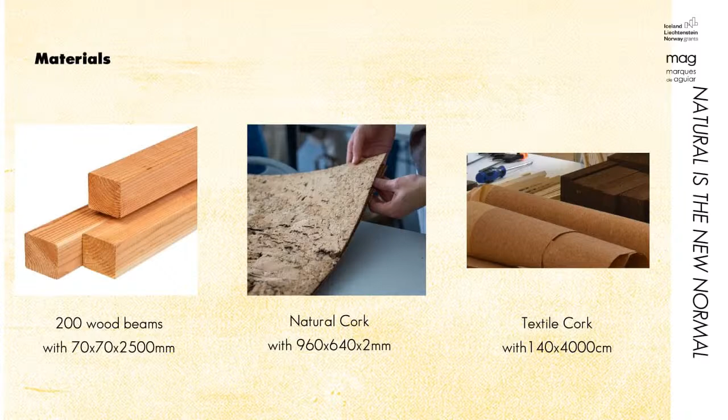The shelter will be for 5 to 40 people, and the idea is to use wood and cork with the dimensions that we'll share now. It must be very easy to build, disassemble and transport in a car, with assembly and disassembly by people with no construction experience, like us. The winning project will be the foundation idea for the construction of an itinerant shelter as the first Experimenta Paisagem Museum equipment, as well as earn a trip to Norway to participate in a workshop with architect and professor Sami Rintala.

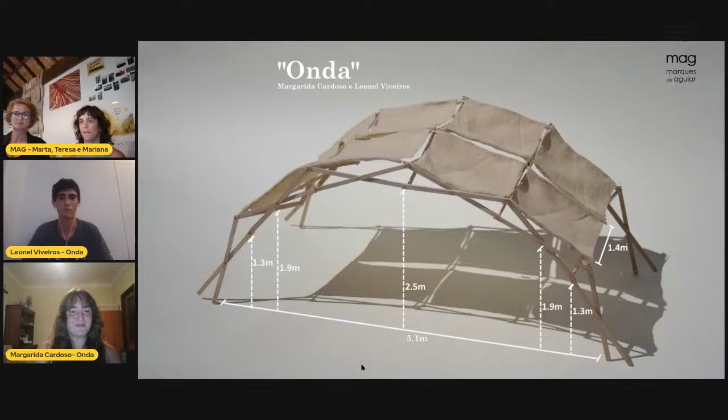But here we have just a few measures of the Onda. So you can see on the max point 2.5 and on the minimum 1.3. So you can get an idea of the proportion, or how it would be in real life when constructed. And that's it. Thanks, everyone.

Okay, thank you very much, Leonel and Margarida, for your presentation of Onda, with this structure that seems like a mechanism with a sequence of hinges that aim to achieve this challenge to go in the car and to be easily assembled by anybody. Thank you very much. So we go to the second group, Concertina.

No, here, we have Bruna. Which one of you will? I think that's Bruna. Yeah, Bruna is here. Bruna, okay. Sorry, Beatriz. Which one of you is Beatriz? Beatriz. Yeah. Okay.

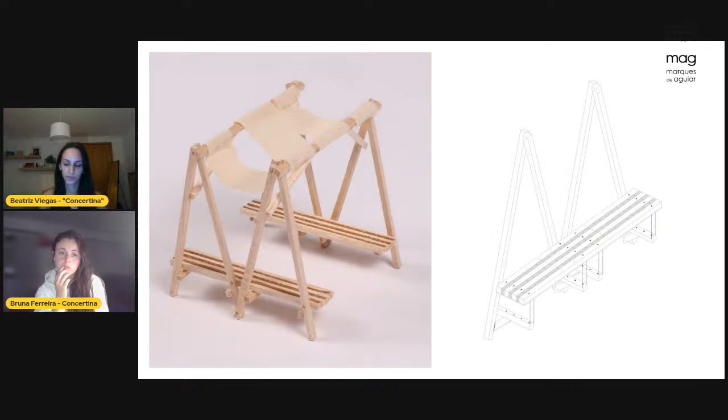Just like a concertina, our shelter expands and contracts in size, which means that each module can have two different configurations. The first one is the one we see here, where the structure is more open, and the second one is this one, where the structure is more closed.

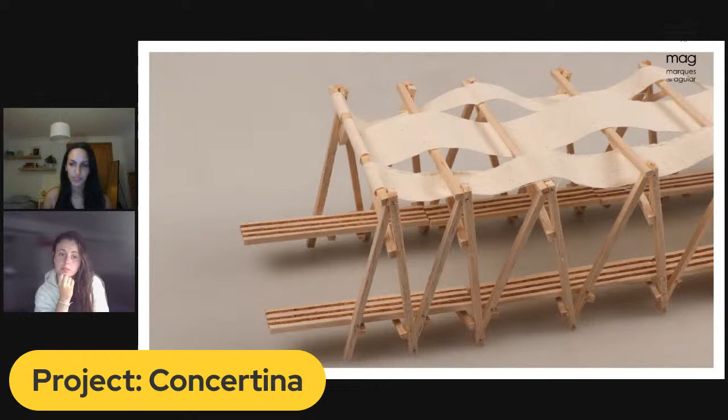This shelter is formed by three main elements. The first one is the structure. The structure is made with wooden beams. The second element is the benches. We have one on each side of the structure. They are also made with wooden beams, but they are also combined with cork blocks.

The last element is the cover of the shelter. This cover is made from strips of textile. This adds movement, delicacy, and fluidity to the shelter by creating a contrast with the wooden beams and their stability and rigidity.

We wanted our shelter to be versatile and adaptable to different environments. So that's the reason why we decided to design it with modules. Depending on the number of participants for each event, the shelter can have from 1 up to 6 modules. They can also be arranged in various ways, attending to the type of site and the type of event that is being planned.

Here we have some examples of ways that we can organize the shelter. The modules can work individually, but they also can work together. In this image, the shelter is arranged in a straight line, and all of the 6 modules are used and connected. This configuration can be used, for instance, following the direction of a street or on a bridge.

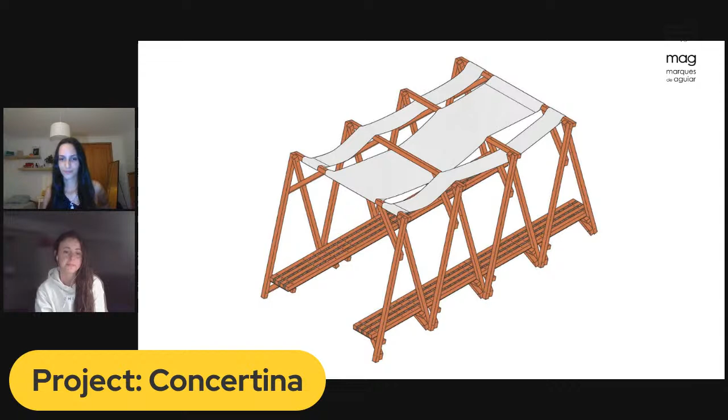Okay, thank you very much, Beatriz and Bruna, for your presentation of Concertina, this interesting proposal with a portico structure with a counterbalance of a bench, thinking together shadow and sitting. Thank you very much. So we're going to the next group.

Just a second. Jorge, can you put the... in display mode. Modo da apresentação, o slide. Oh. Can you see it now? Not yet. And now? Yeah. Sorry.

As I was saying, today we are going to present our project, in which we put a lot of effort, creativity, and sensibility to reach our final idea, doable by any kind of person, especially young students with zero experience in construction.

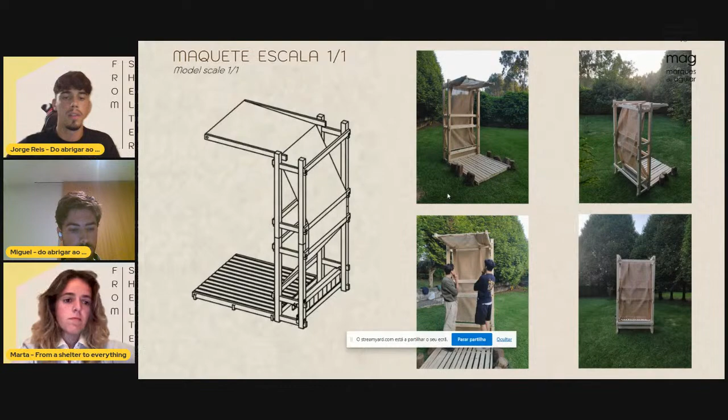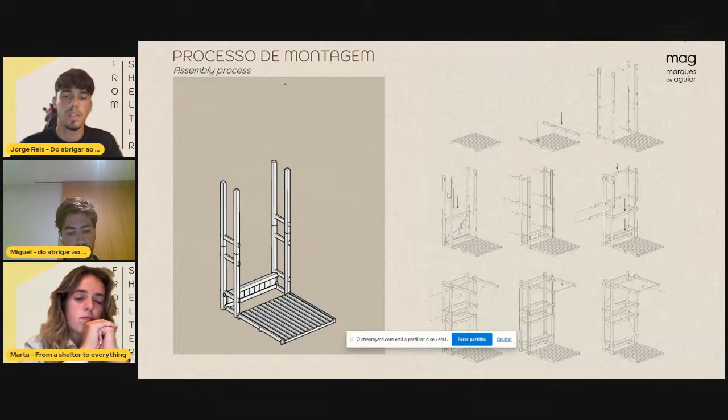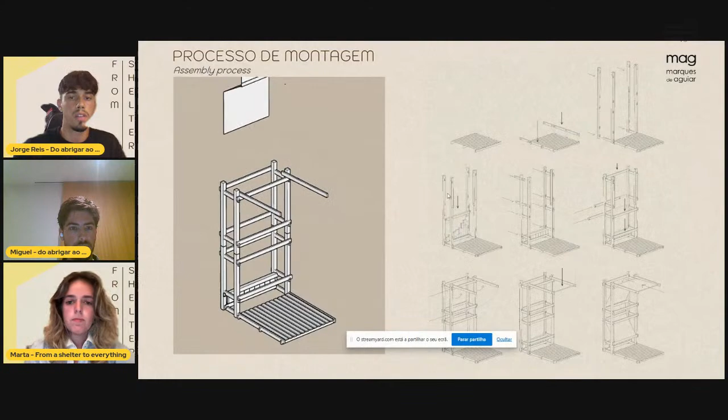As you can see, the approach chosen to respond to this project was the development and construction of a simple, versatile, and aesthetic model. For its visual character, the various forms of the materials available were contemplated, making use of the wooden beams, the dense blocks of cork, and the flexible textile also in cork. These features and materials result in a strong visual identity, even when the model is isolated in the territory or regrouped with many copies in a whole.

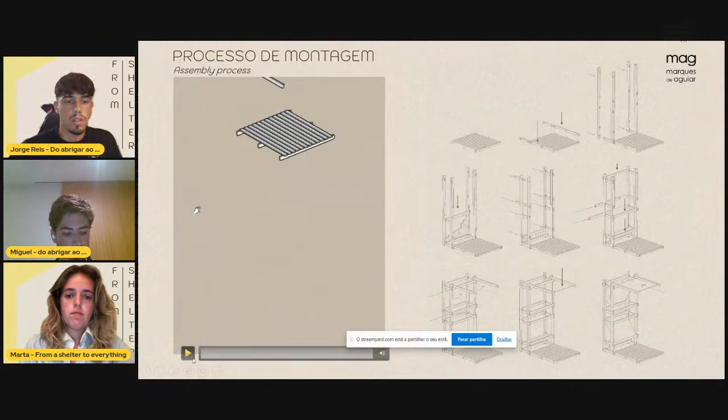How was this model developed? Taking as a fundamental concern its process of assembly, disassembly, and transportation, it was clear early on that we needed to avoid fitting using nails or definitive solutions that would delay or compromise this process. As you can see in our assembly process, the animation shows how we can assemble our model really fast and then repeat the process.

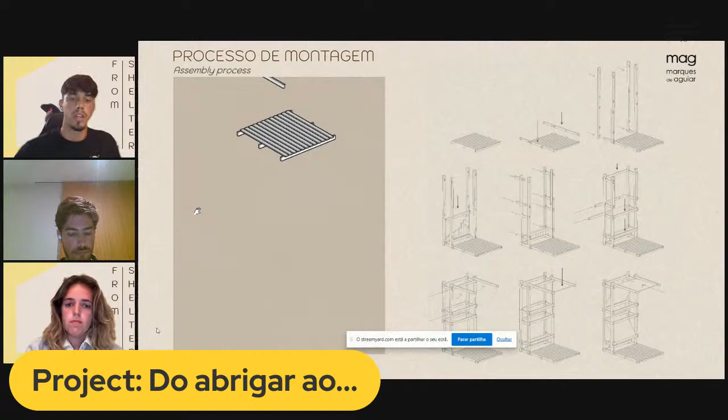A modular piece was then designed that offers the occupant a floor raised from the ground, a multi-purpose intermediate structure, and also a possibility of covering to shelter either from the rain or the sun. These same constructive steps were respected in the construction of a full-scale prototype, validating this methodology. The pallet-style structure that serves as a floor is the only element that uses nails. However, this piece comes already pre-assembled, as you can see on the second graphic.

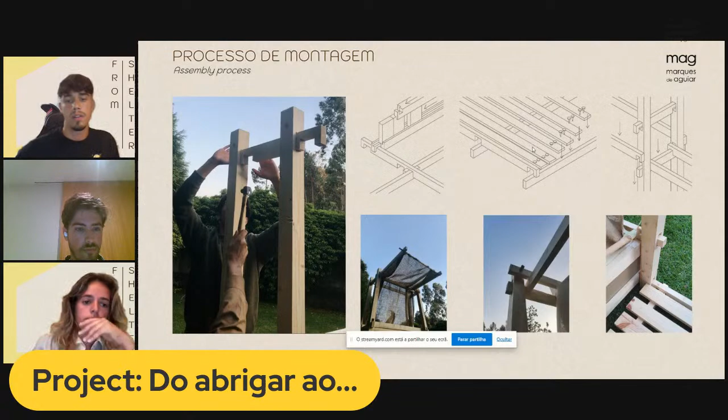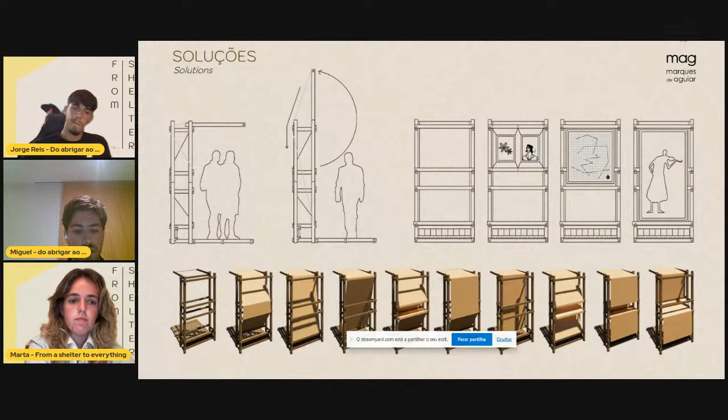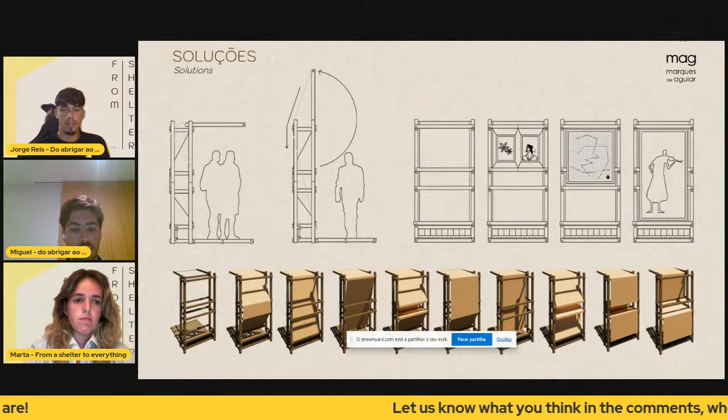The decision to design a module comes from the intention to take advantage of the versatile character that a solution of this nature has to offer. The module is itself capable of opening up to the sky or sheltering from it through a system of moving parts. It serves as a shelter, but also as an exhibitor for paintings, information panels, or large screens. The skin that covers it also allows it to present a very varied stereotomy through a dance between this flexible material and its more fixed wooden structure. Wind interacts with it as well in a natural way.

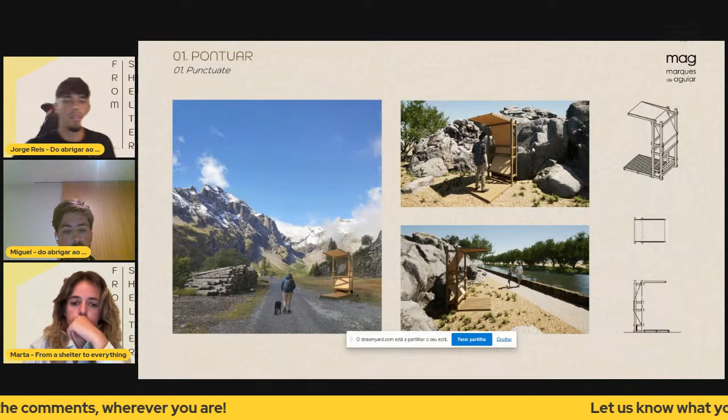Punctuate. In isolation, it works as an information post, meeting point for groups, and trail marker. Through a modular repetition exercise, we can design other typologies. In this case, isolate: closed on itself, providing a more introspective and private character, for example, for meetings or sessions of meditation and connection with the present moment, easily deployed in any type of enclosure.

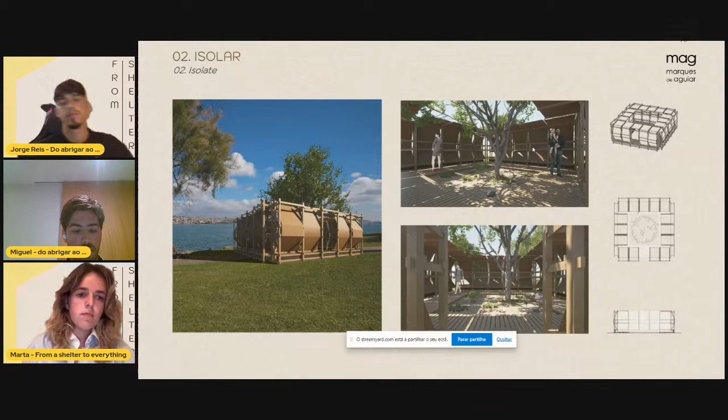Number 3, celebrate: a wider solution for programs such as performances or local markets, activities with a larger audience in places such as squares or historic centers. Number 4, follow: a more extensive composition in order to follow trails or draw new routes, being able to narrate a story or exhibit an art collection, thus allowing this architecture to be immersed in more challenging and narrow spaces.

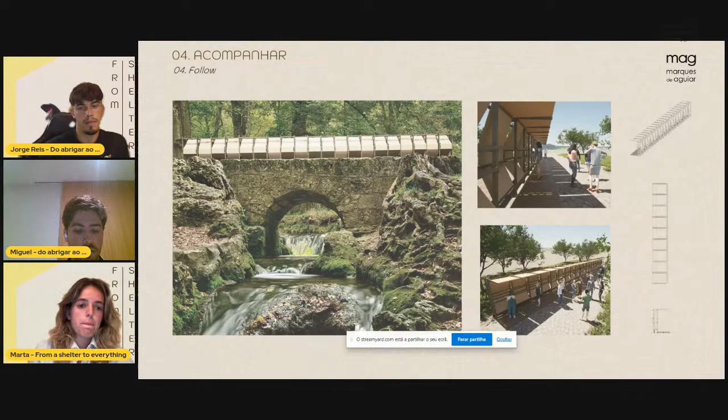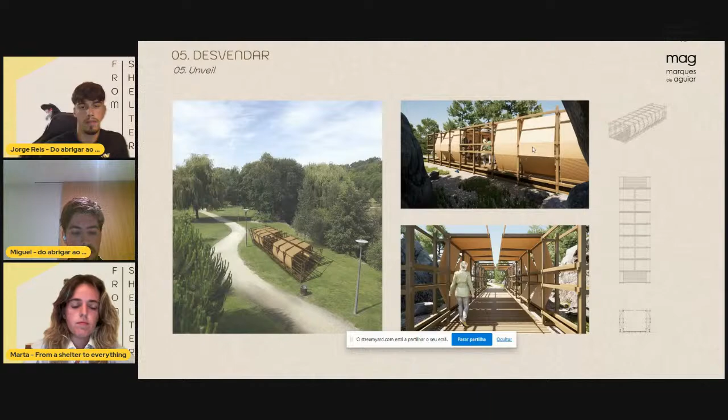Number 5, unveil: for a more immersive walking experience, this tunnel-style composition can be applied to streets and historical parts of the village, completely sheltered from rain, wind, and sun. And finally, number 6, rest. Valuing the landscape, this last solution aims to frame and use as scenario a particular perspective of its surroundings, such as a waterline, a plain, a mountain, a valley, or a viewpoint of the village, as a background for events like lectures, dances, or other types of activity in which a deep connection with the surroundings is sought. Closing on all other sides, the vision is guided to a single direction.

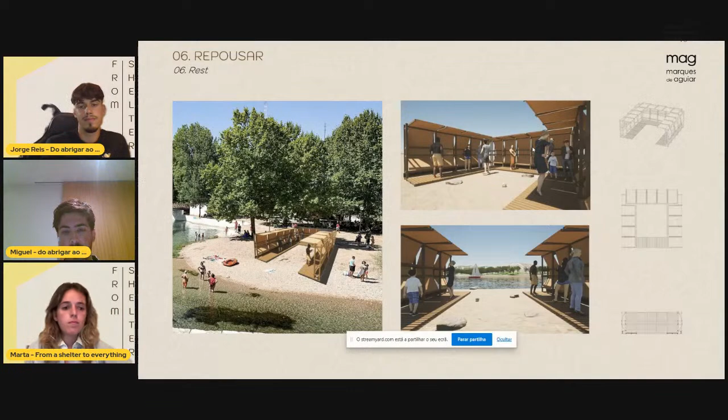From an early stage, we understood that this project challenged us to think beyond one place and one purpose, that the answer will be a flexible and adaptive architecture, able to dive and dance through the streets, squares, beaches, trails, and nature that will soon be the stage of Cortiçada Art Fest. Its location and artists are unique and deserve an architecture that values them as such. This is our proposal, from a shelter to everything.

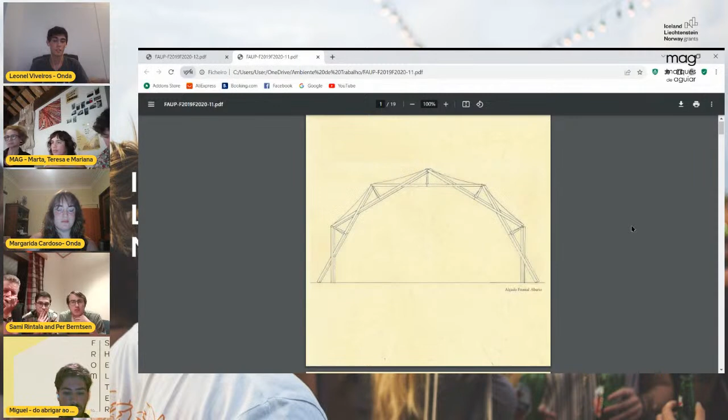Right, this one. I think this one may work. It's on PDF, but it's what we have now, so it may work. So we have here the drawings that we used to submit the project to the event. They are drawn by hand, as you can see, because our group is from the second year so far, so we don't use much computer yet. So it was kind of amazing that we were able to do this.

You asked about the main structure, this one in here, whether it is metal or isn't metal. So we put it in metal, the main frame that connects all the woods together to do the first movement and the longitudinal movement. It doesn't need to be metal. It can be in wood. At the moment, we put in metal, but next we thought about wood, etc. But the time was already up, so we stuck to metal. Why metal?

So the metal was my idea. I put in metal because I have a little experience in construction, not architecture, but home stuff, little things you do. So it was only thinking about the safety of the structure. I was thinking about the wind, because it's a big structure, as you can see. And yes, you have little spaces beneath the cork, the fabric cork, to let the air and the wind pass.

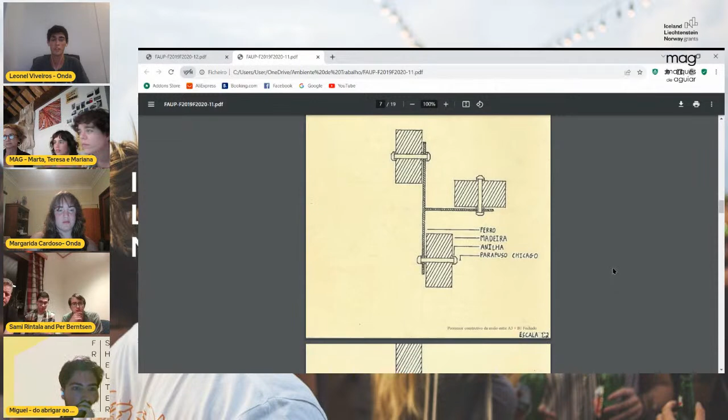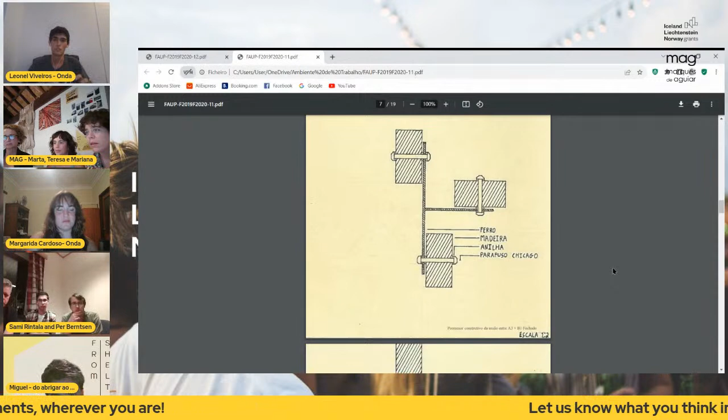But I was thinking that if the wind is too strong, it may break, and it's not going to break in the boards. It's probably going to break at the junction of the boards. It's the weakest point in my view. So I stuck to metal. Simple, that's it. And someone asked me the way the whole structure closes and stays together. That's a part more for Margarida, but I think I can explain. When we designed, we didn't build it at 1:1 scale, because it's a big thing. So we thought about it when it's closed, when you see a junction closed, and just go faster in here.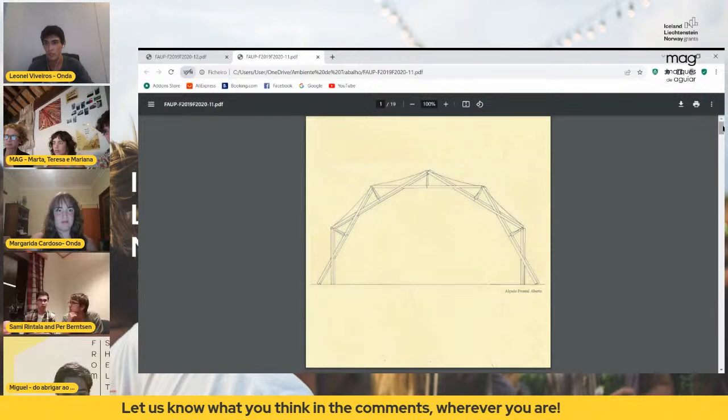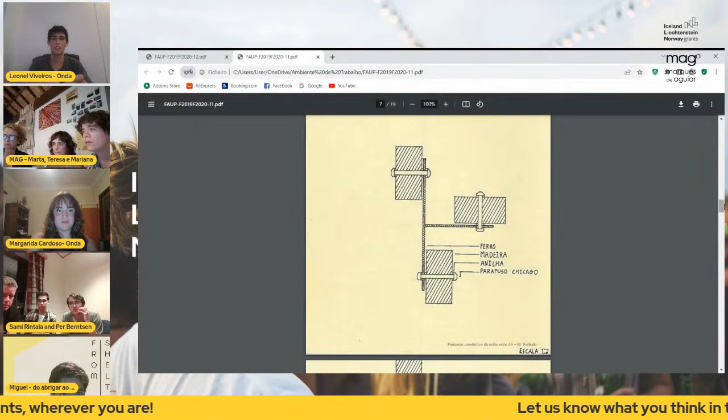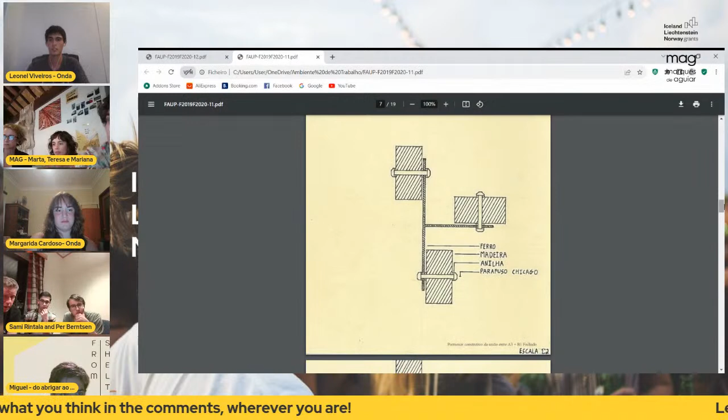These are the junctions, the different views of the junction, and this is the way the woods are connected. It's mainly because of this type of screw, that's the main thing. Where I have this screw is in here. So this is the thing that holds all the woods together. When it's closed, it's supposed to look like this, and the rest is a connection of different pieces that you are seeing in here. And at the end, it will look something like this. It's the way the woods get together and they all stay in a big piece of, how can I explain this? It will be mainly like a big box when you close everything together.

It will mainly look like a big box, and this is the top of the box. We didn't draw it, something like that. When you look from the side of the box, it will all be together. We believe it will work because of the way we got the woods and separated them, and you see in the image they are not too close, and it allows all the movement the wood needs to do to get to the spot it needs to be. We tried it, and it gets there, and the wood doesn't get in the way of the other parts of the structure. It's just a complex way of getting the woods to the right spot, mainly. That's it. I don't know how I can explain this any better. My English is not good, so sorry.

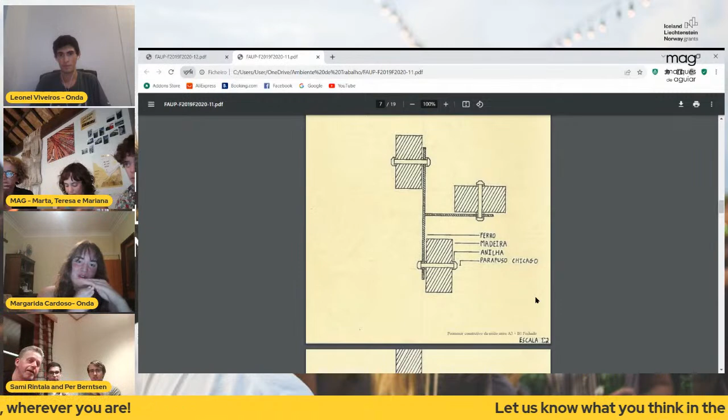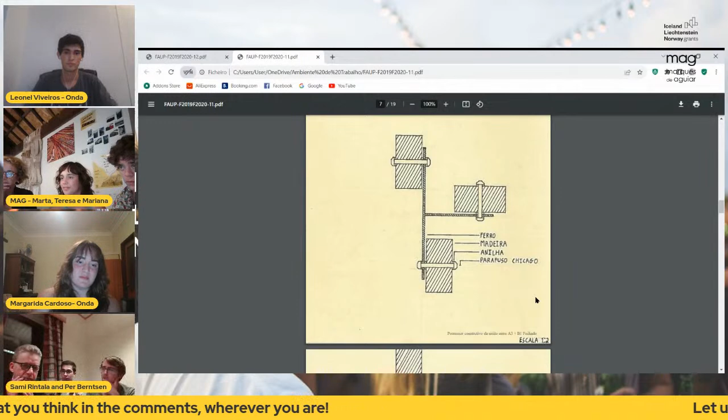That's fine. It's basically a metallic T, so every beam can move freely. So yeah, mainly. Thank you, Leonel and Margarida, for an elaborate explanation.

It would maybe be a good idea. I understand why you didn't build the whole structure. It would be quite a task to do a full-size build of a structure, but it could be very interesting to see studies of the joints in one-to-one format. So you could see the weaknesses and strengths, and also the challenge in constructing the joints the way you have proposed. The drawing in 2D is one thing, but to see it in 3D and do it in reality with the metal and the wood and trying to fix it together, I would recommend that. To learn that, to test the ideas and so on. And you will get very far by that without building the whole structure. Thank you.

Okay, thank you. Maybe now we can move to the next group, the concertina. I'm going to put the image. And the concertina is Beatriz and Bruno. Beatriz and Bruna. Okay.

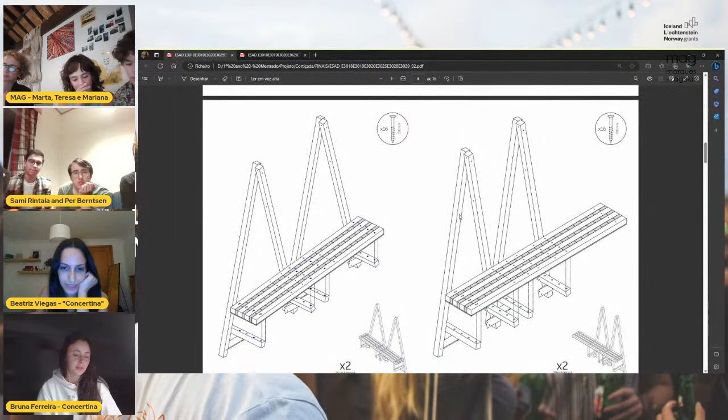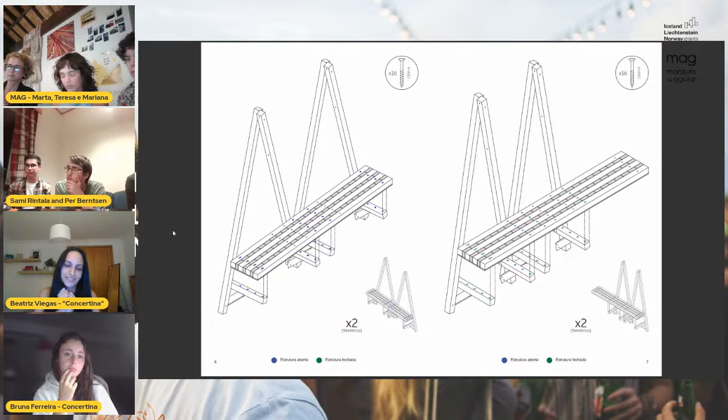Can you see? Yes. So the benches are connected to the structure by screws. And this works in modules, so this is one module. So the modules are not connected in the benches? They are connected.

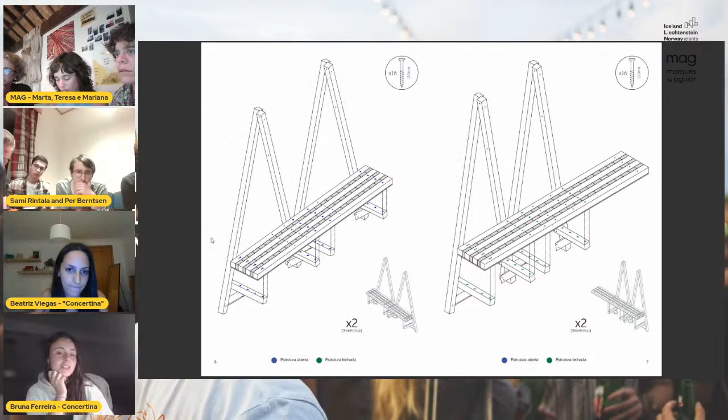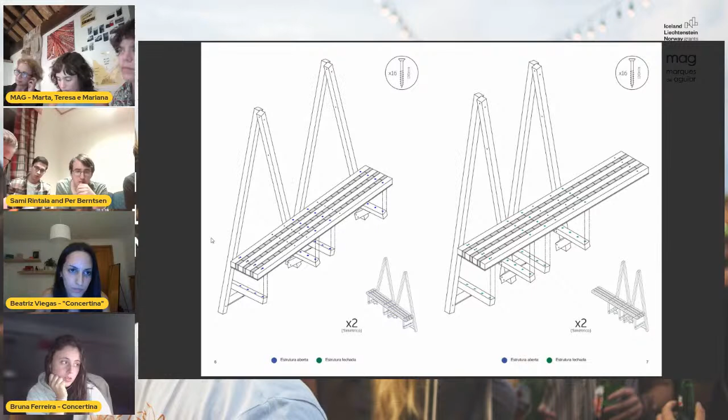Can you go back a little bit? A little bit more? Yeah. Is this a first idea? Because you have the support of the bench as a vertical member and then a horizontal member, and in the following one, it seems to be a diagonal holding the bench. If you move to the next slide, yeah, you see here... No, it seems it is the same. Yeah, it's the same.

Oh, okay. I noticed that the posts leaning towards each other are making a sort of triangle and a promise of a stable structure. But when you are looking at the benches, I wonder if they are able to take the horizontal load in the longitudinal direction. Do you see it to be stable in that direction?

Because if there's room for several people to sit there, what would be the structure's capacity to handle the longitudinal load? Yeah, we projected this with our professors, and they are architects, so they helped us, and I think he said that it was okay. So yeah, it can work. We are just a little bit unsure about it.

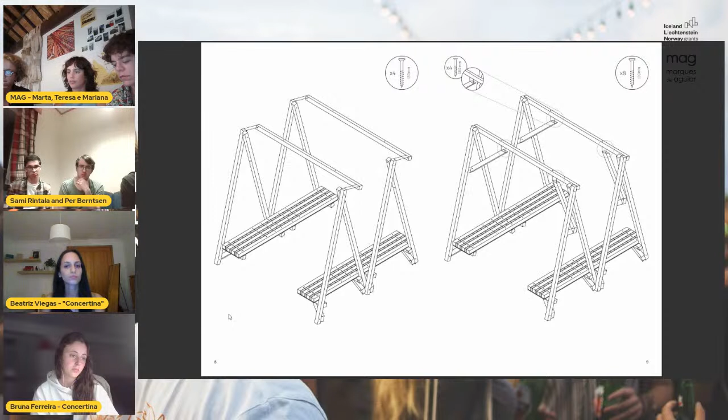Yes. Otherwise it starts hanging a little bit. But this also depends on the wood. Maybe you have a little bit harder wood in Portugal than we have, because we have quite soft wood. Yes.

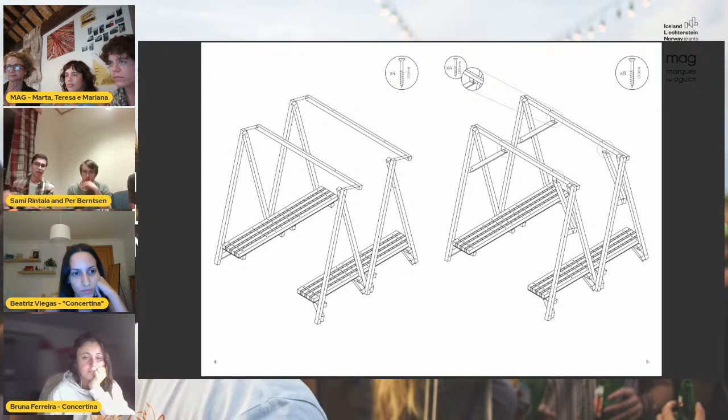Okay. I would like to point out that this model is really self-centered. The benches look into each other, and maybe opening towards the outside would have been a really good idea to further develop this model, not only in the space it encloses, but in its orientation. Adding benches also on the outside of the structure, that's an interesting idea. And then it would have balanced the weight load on the poles a little bit. Just these kinds of comments.

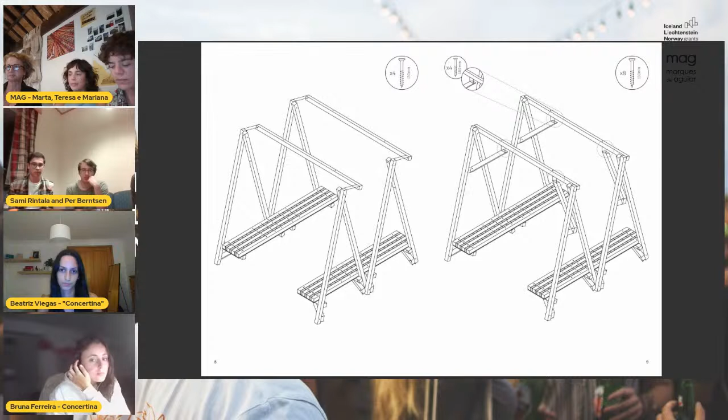Yeah, so maybe if you didn't screw and did something which was fixable, you could have benches either on the inside or on the outside, and then share loads according to whatever you're doing in that moment. That's a really versatile structure and really nice. So well done. Thank you.

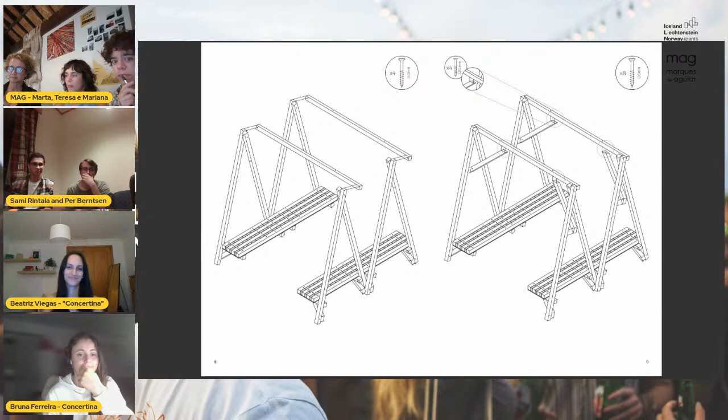Okay, so maybe now we can go to Abrigar ao, our last group presenting here today, with Jorge, Miguel, and Marta. Okay. Hello.

My first comment when I saw this was immediately, it reminds me of a loom, which I think very much suits what the brief of the project is. And it definitely, through the various images that you used to sell the project to us, was shown to be very versatile.

We do admire that you made the entire thing in one-to-one, representing that you could very easily build it with your skill sets, and that others could probably build and assemble the pavilion quite easily themselves. We did see, however, to create the formations that you represented, you would need quite a lot of them. And I was wondering personally, would that affect the material amount used, or is it similar to other pavilions?

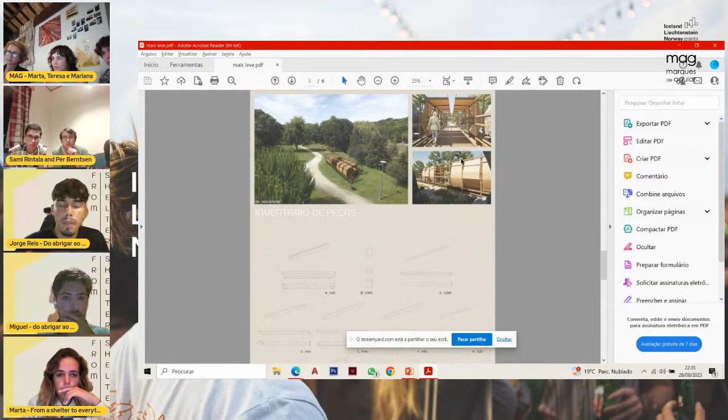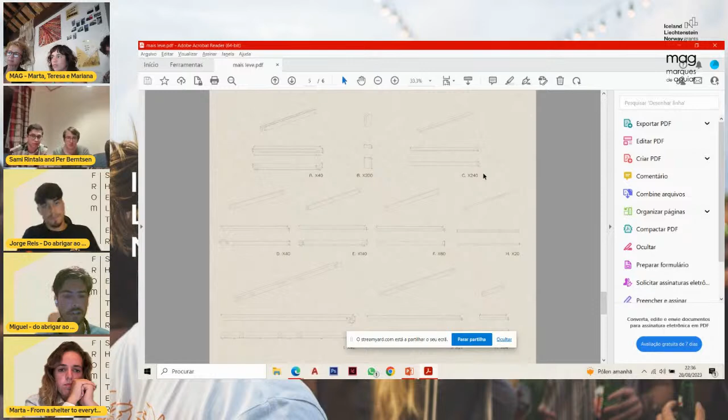Okay, maybe can you zoom a little bit so it's more visible? Maybe a bit more. So this is just to serve as a proof that we counted material by material, piece by piece and dimension by dimension to make sure we are not making up extra material. Okay, we believe you. Thank you.

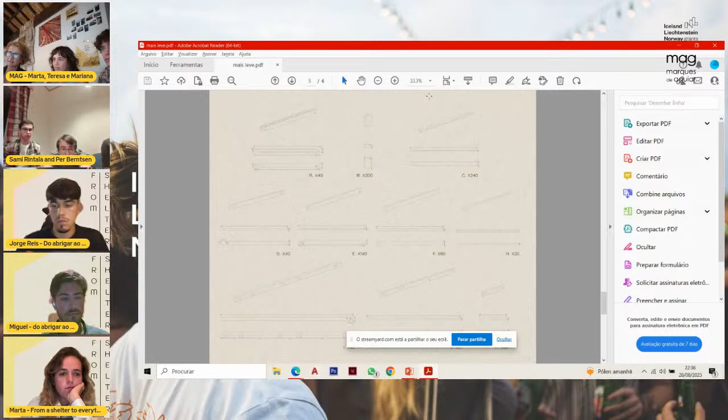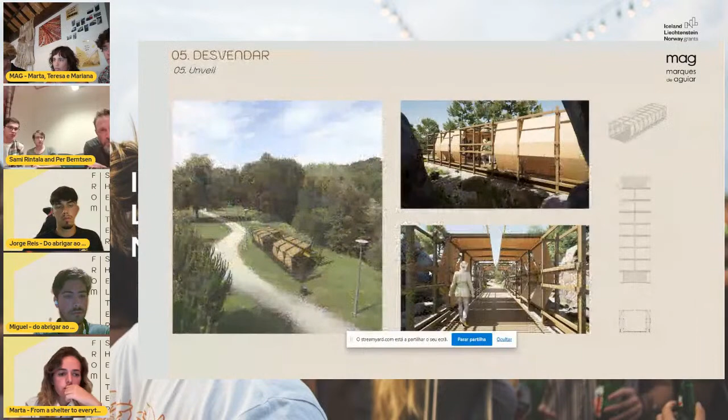I think in a way the other two groups are making one bigger structure out of the materials, while you are making a kind of furniture, a smaller structure, and then by repeating that furniture, you are creating the bigger space. And I feel it's quite clever for these materials, which is quite thin wood and quite fragile textile, that you don't over expand them, but you go into the smaller scale with them and then repeat and make a bigger scale.

So I think it's a very good idea, and you are also impressing us with the images showing how many ways you would put it together and create these kind of urbanistic spaces, really. But if I want to say one negative thing, I would have studied the object itself a little bit more to make it on the same level as the rest of the presentation. But I think it's a very good project.

Thank you. I'll add that it's a really great object, and as they said, a really good idea to think in a smaller scale to make a bigger scale. I think it has a really great linear aggregation. When it comes to the corner, it looks like you kind of overlap. I couldn't see really well on the presentation because it was kind of small. Maybe you can zoom in or explain how you solve the corner, because it's always an issue.

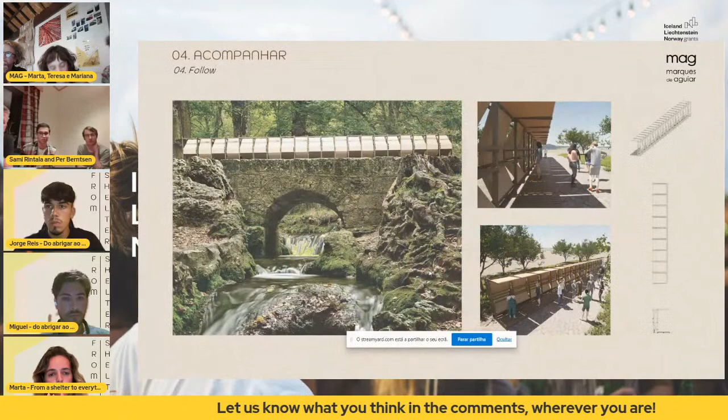Definitely the corner is a bit of a trickier part, because in the beginning we also wanted to offer some sort of platform where people could walk over. So in that moment, and also with the covering from above, we can extract the roof as well as the platform where we step in. And because they work as square, movable pieces, we can remove them and just keep the vertical planes touching diagonally in between them.

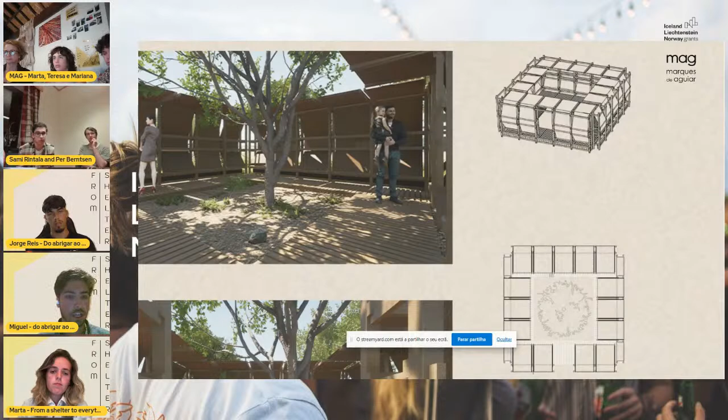For the moving parts going up and down, to cover from the sun and rain, or just to be open to the sky, we can either do it manually, or use some sort of cord to pull it. We can also tie them diagonally with that type of material if needed, maybe in cases of high winds.

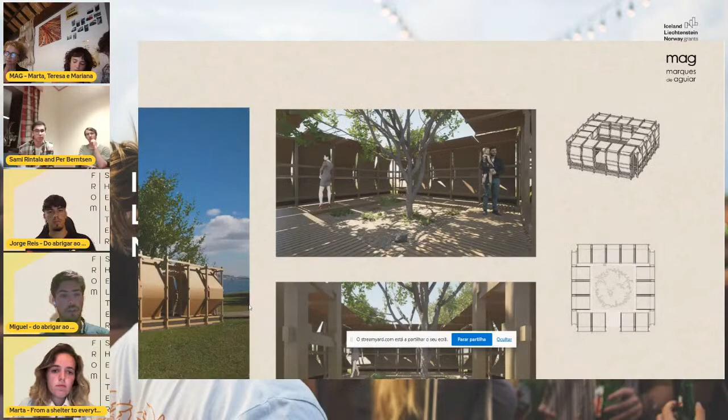But basically, with the building at 1-to-1 scale, which was very important, we built this thinking that if we make a platform in the right way with the pieces in the right sequence, putting people on top of the platform will help fix the structure down. So the more people go over the platforms and around these compositions, the more stable and fixed to the ground it gets.

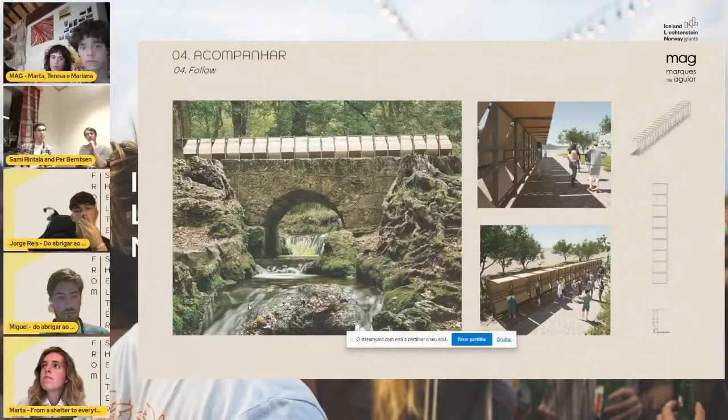And now we have some questions on Instagram. For example, Swim Tana asked about the Abrigar project: how long did you take to make the one-to-one scale model for your project? Thank you for the question. First of all, from making the drawing of each piece to getting a wood producer to get us all the pieces needed, it took us a couple of weeks, because it was not 24-hour work, but it took us quite a long time.

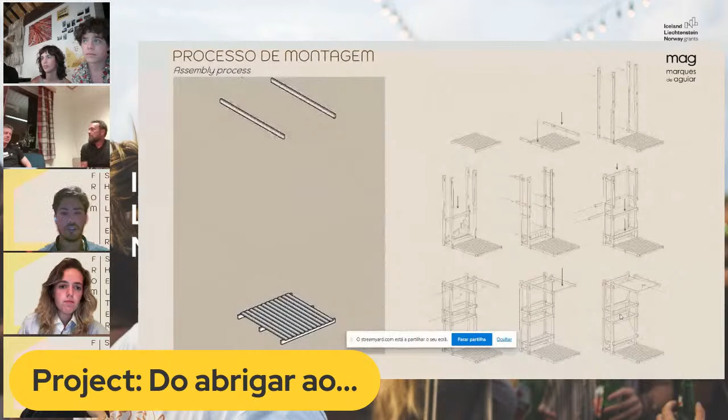But once we got all the pieces and the place to put them together, we took more or less seven minutes, because it was the first time ever we tried to build the pieces together, and also because we used the wood that we got at the time. We really wanted to have a one-to-one scale model to deliver, so we went for any type of wood we could put our hands on. In this case, the wood was not 100% perfect for the job, but all in consideration, 7 minutes was the time needed to put everything together.

Okay, nice. That's good to know. That's important. It should be faster with time. Okay. With experience of the constructors too.